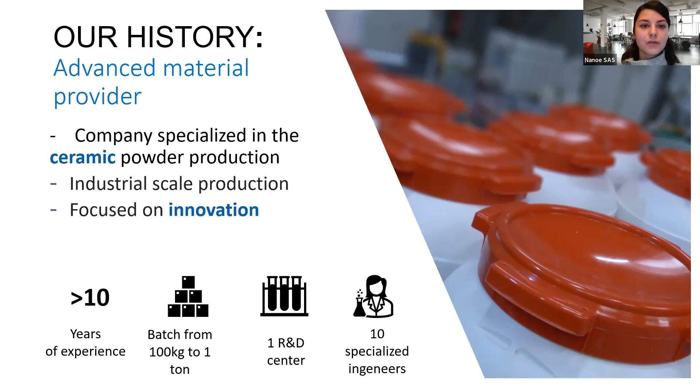So about our Zetamix filaments, I'm going to explain a little more about the technology and the advantages. They are really affordable because this technology is suitable with any FFF 3D printers. Our filament can be used with FFF 3D printers, so it's quite affordable. It's also easy to produce and easy to print, because FFF 3D printers are one of the easiest technologies of 3D printing.

For us, it's important to guarantee good material properties for our filaments, whether ceramic or metal, because we are a raw material provider. So the final part you get thanks to our filaments has good wear resistance, mechanical strength, and heat resistance, the same as our powder. Thanks to FFF 3D printing, it allows us to print hollowed out parts, internal channels, and other intricate structures.

The density of our parts is also important for us, and it's quite high: 99% for our ceramic parts and 95% for our metal parts after the post-process. And the last thing is that it's one of the fastest 3D printing technologies, because FFF 3D printing is one of the fastest.

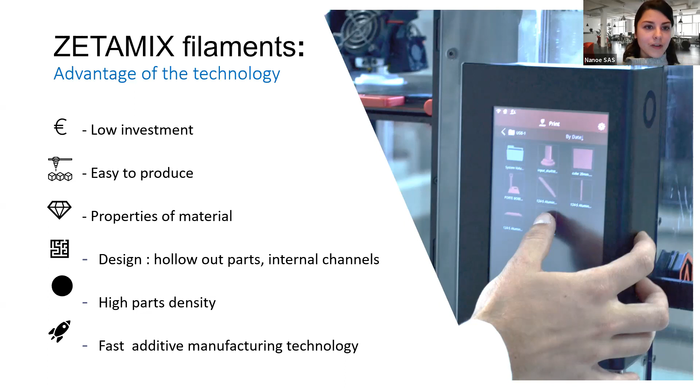So now I'm going to go into more detail about our offer. We are a material provider, so we provide filaments in alumina, white zirconia, and black zirconia, and stainless steel and H13 for metal.

We are not a machine manufacturer, but we provide machines to make sure that our clients have all the right equipment to begin printing and producing parts. So we provide a printer, the Raise3D Pro2, a debinding kit, and a sintering furnace, the Zeta Sinter.

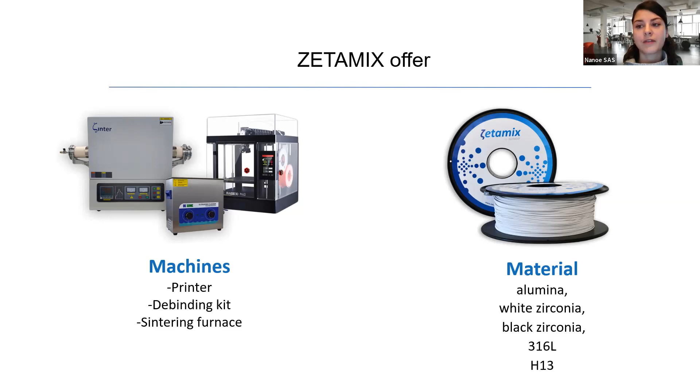So what is in the filament? Our filaments are a mix between ceramic or metal powders and two kinds of binder. To make sure our filament is printable, we cannot make filament only with powder; we need some binder to make it printable. Because of that, we have a post-process to reach the 99% density, or 95% for metal.

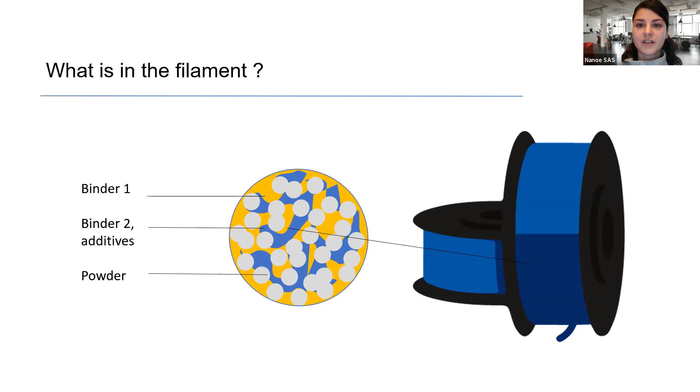So I'm going to detail the process a little more. First, let's begin with the ceramic process, alumina and zirconia. It's a 4 step process with file preparation and printing, the same as any FFF 3D printing process. After these 2 steps, we have a debinding step, a chemical debinding process to remove part of the binder. And after, we need to sinter the part under air to make sure the part densifies and reaches the final density.

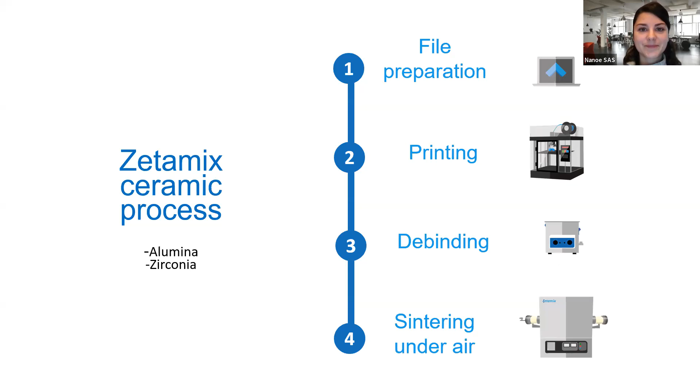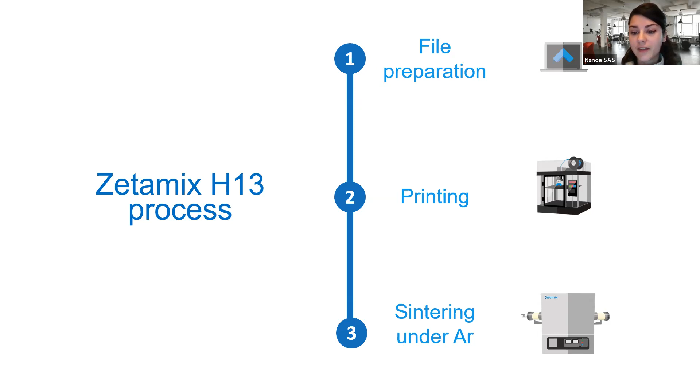For H13 filaments, the process is only 3 steps, with file preparation and printing, but there is no chemical debinding step. The sintering and debinding can be operated in the same furnace, done under neutral gas and argon. This can be done thanks to our Zeta Sinter furnace.

For our stainless steel, it's a little different too. The file preparation and printing remain the same, but the sintering has to be done under hydrogen, and this step cannot be done with our Zeta Sinter furnace and needs a specific furnace.

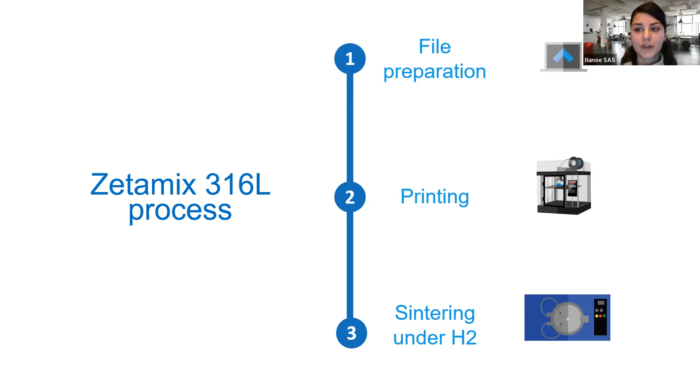I'm going to detail each step a little more, starting with file preparation and printing. As I said earlier, it's almost the same steps as regular FFF 3D printing. The only thing you need to consider is the shrinkage—your parts will get smaller during sintering, so you need to make the part a little bigger than the final one during the file preparation step.

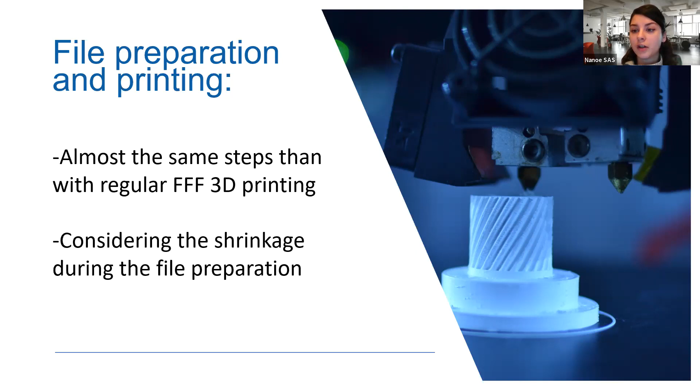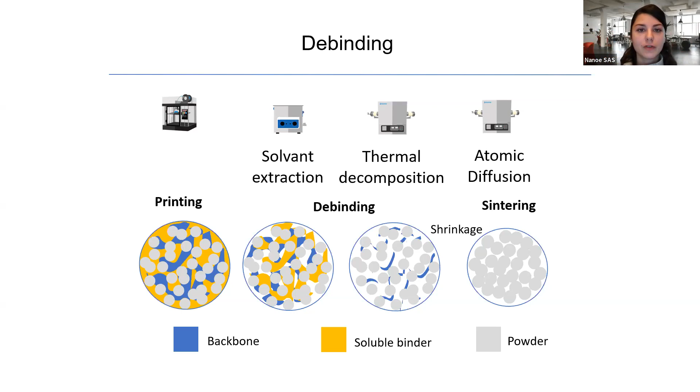For debinding, let me explain what happens during chemical and thermal debinding. Our filaments are made with ceramic or metal powders and two kinds of binder. The first step to reach final density is removing this binder. For ceramic, solvent extraction removes part of the backbone and the soluble binder. Then thermal decomposition, whether for metal or ceramic filaments, removes all the soluble binder and more backbone. After that, during sintering, shrinkage happens, the part gets smaller, and all the binder is removed. I'll explain that better in the next slides.

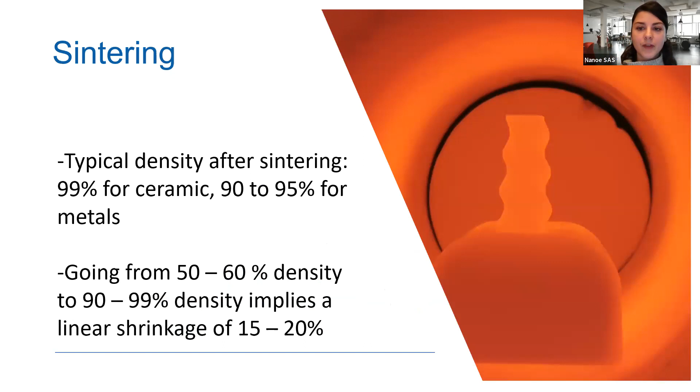Now, the sintering. Our parts have high final density, but your printed part only has 50% or 60% density. To reach 99% density at the end implies a linear shrinkage of around 15 to 20%. So what happens exactly during this sintering process?

There are three stages. The first, when you put the part in the furnace, is the initial stage where you have a green part—it's like thermal debinding, when the backbone and binder are removed. Then the furnace goes up in temperature, up to 1200 degrees Celsius, and there is neck formation between powder grains, as you can see in the picture. In the final stage, when you reach 1400 degrees Celsius, the grains coarsen and the part becomes smaller. That's what happens during the sintering process.

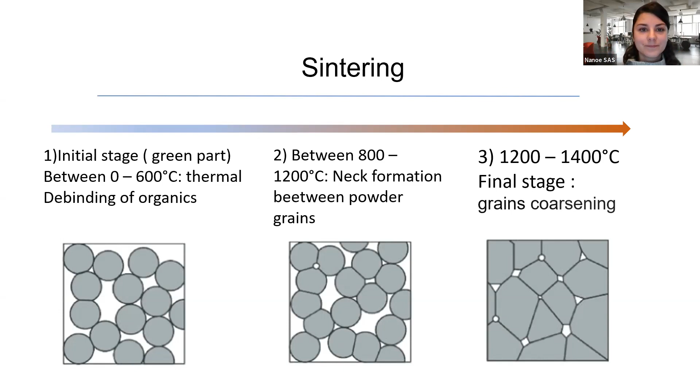Now that we've explained the whole process in detail, I'm going to go into the applications by use case. I'll present some use cases from laboratories, industries, and final parts from luxury. I'll begin with a ceramic example, and after that I'll introduce some metal examples.

My first example is the LMPCA laboratory. This laboratory specializes in the study of ceramic materials. They are studying Zetamix parts, and they take this opportunity to use Zetamix technology to make laboratory consumables and facilitate supply chain management.

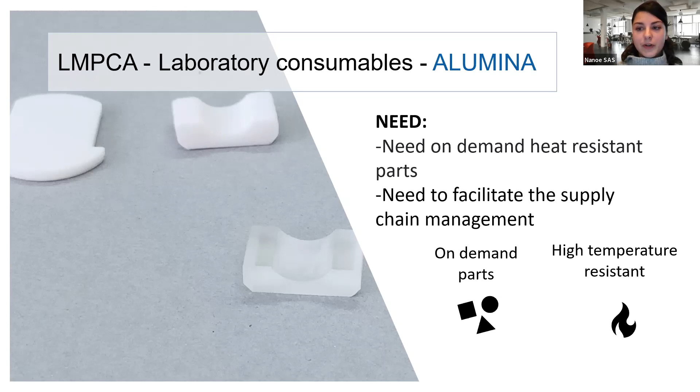For example, my favorite here—they are printing thermogravimetric crucibles. This is the crucible. Why are they printing it? Because this part is a really tiny, very expensive crucible that is only used once, since the powder can pollute the crucible during the test. Because of that, they need a very precise supply chain management procedure, and it's easier for them to print this part and internalize its production than to ask for a quote and wait for the product.

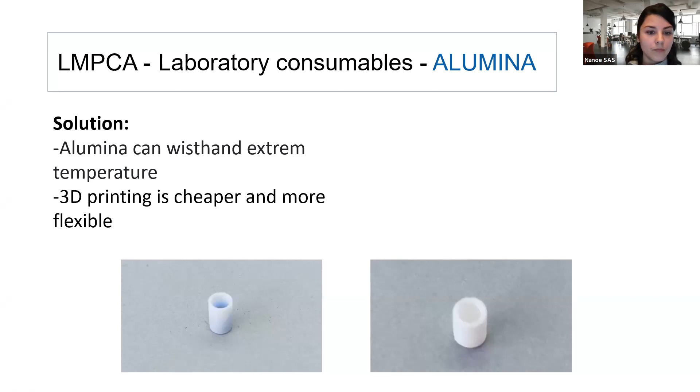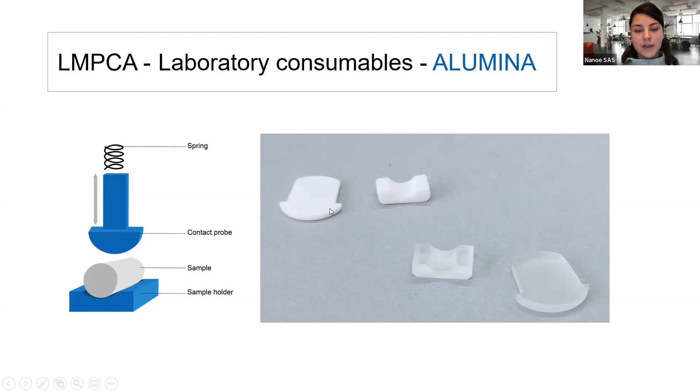The second use case is more industrial—I'm going to present the application from Orbital Service. Orbital Service is a company specialized in orbital welding machine manufacturing, and to improve their product, they invested in 3D printing to solve issues they were facing.

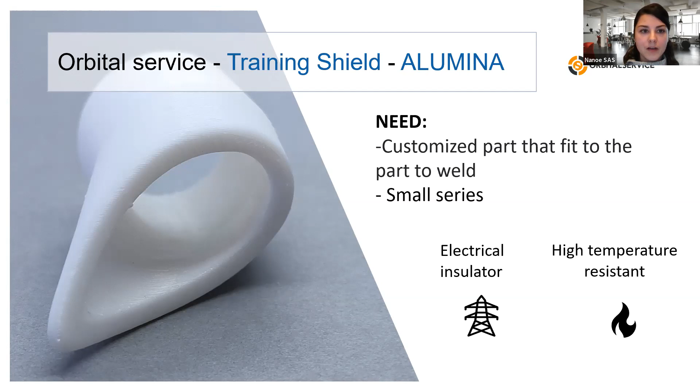The most important issue they faced was oxidation of the part during welding. Because they are welding parts that are not flat but have a round shape, air can interfere and cause oxidation. When the company is welding, they use neutral gas to prevent oxidation, but because the shape isn't flat, there are gaps and air can interfere, as you can see in this picture. So they decided to make this part, the trailing shield, in alumina thanks to Zetamix, made to perfectly fit the tube they were welding.

Why did they need Zetamix technology? Because they needed a heat-resistant product, alumina, and a material that is electrically resistant, to make sure there are no short circuits or similar issues. Thanks to this new part, they can improve the quality of the welding and avoid oxidation.

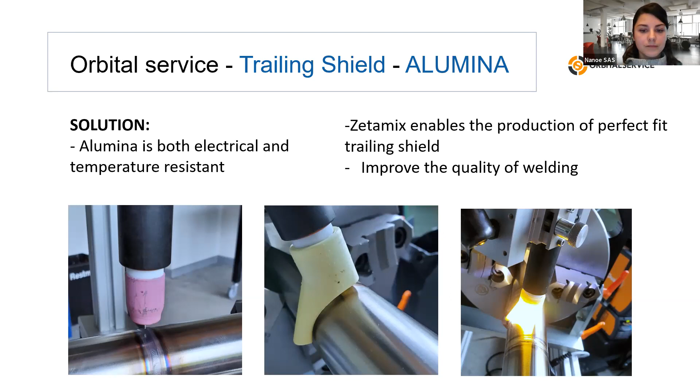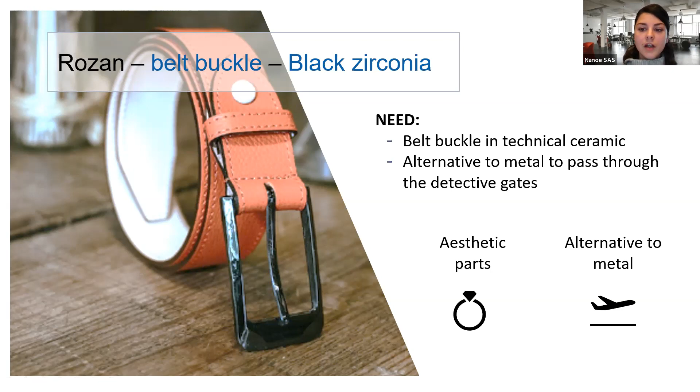For this buckle part, they could not find any affordable solution to produce it, so they decided to make it in Zetamix black zirconia. Black zirconia is a really interesting material for luxury because it has an aesthetical finish. It can be polished or have a matte finish, as you can see here. And of course, it passes through the detector gates. Thanks to Zetamix, they can cut the price and cost of the belt. With a regular process, it would cost 200 euros, but thanks to Zetamix, it's only 30 euros per belt.

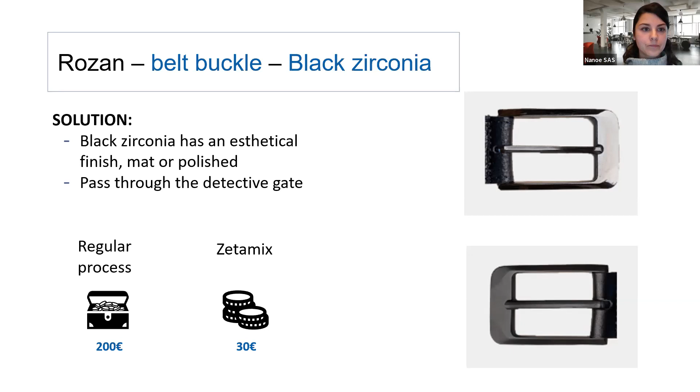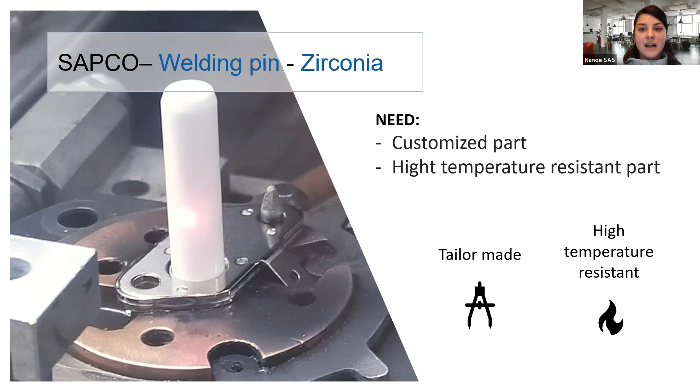But to do that, they need a welding pin to make sure everything fits together, this part here. The machine manufacturer provides them a plastic welding pin. And because it's welding, this plastic part was burning and melting, triggering machine halts every day. So they decided to make this welding pin in zirconia, a heat-resistant material, thanks to Zetamix, because it's easy to process. The part was made in only 5 days, and now this part has to be changed only once a month instead of once a day, reducing machine halts and saving resources.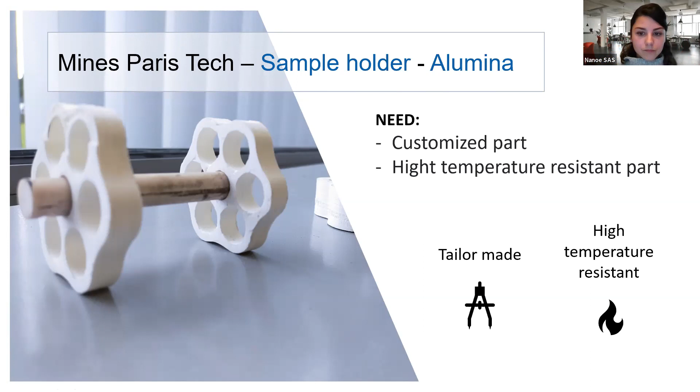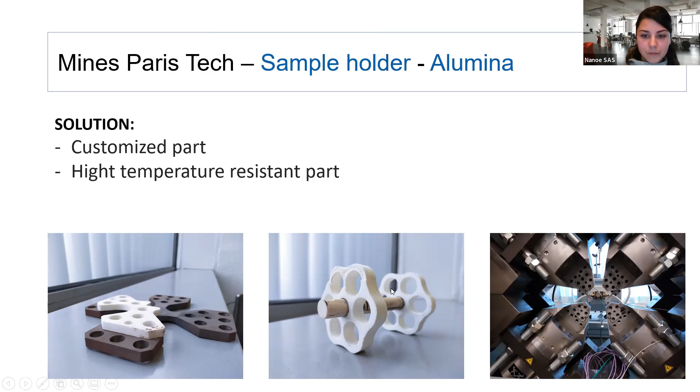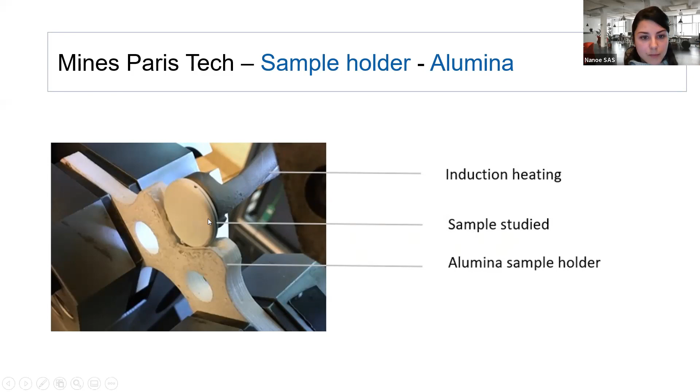Another example is with this machine. Mines ParisTech needs to heat up a small sample, and they have no machine device to do that. So they decided to use their biaxial testing machine to do that, without the option of breaking the part, only the option of heating it up. To do that, they needed some adjustment, and needed to print a new sample holder, the white part you can see here, to fit it here. So you can see the picture. This part needs to be resistant to the electrical induction system and needs to be heat resistant. So you can see here, the induction system, the sample studied, and the alumina sample holder.

I'm going to come back to some more industrial application with Petit Spare Part. Petit Spare Part is a provider of spare parts for the textile industry, and it's important for them to have stock or to make sure they can provide parts in record time. But one day, Petit Spare Part had a new kind of order. The client wanted a part, a thread guide, that doesn't exist anymore because the looms they were using were too old. So this kind of part had to be made in Zetamix zirconia, because it has to be wear resistant and smooth to make sure it will not damage the textile.

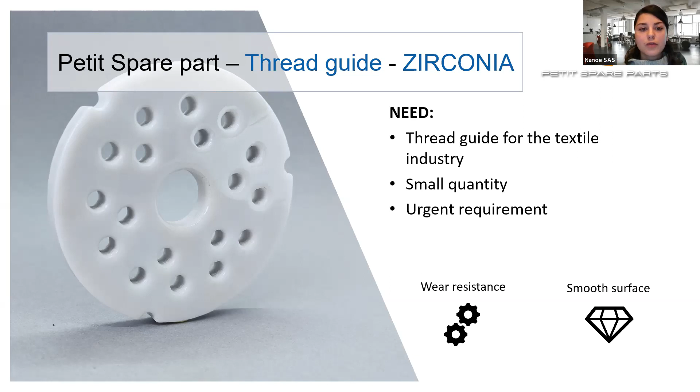Thanks to Zetamix 3D printing, Petit Spare Part succeeded in making this part in record time in Zetamix zirconia, because the part can be made in only 5 days. And after polishing, the part was really smooth and, of course, wear resistant.

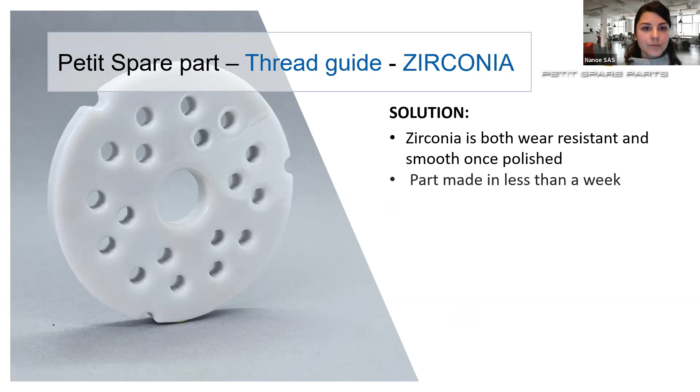So let's focus on more metal applications. I'm going to begin with stainless steel with this jaw. The industrial company wants to stay anonymous, but this company wanted a jaw adapted to the machine and the part, and wanted on-demand parts.

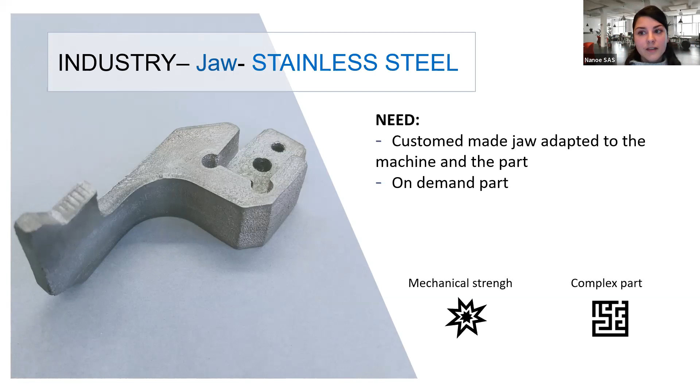So Zetamix technology was a good solution because the part in stainless steel has a very good mechanical strength, and it's possible to make complex parts. The solution enables the company to save resources, because if they would like to do this part with a regular process, it would cost 150 euros.

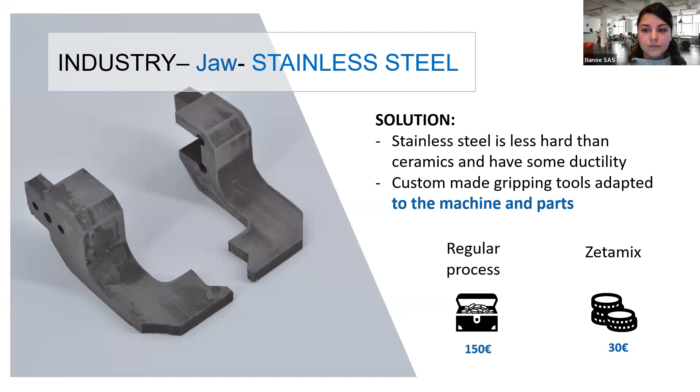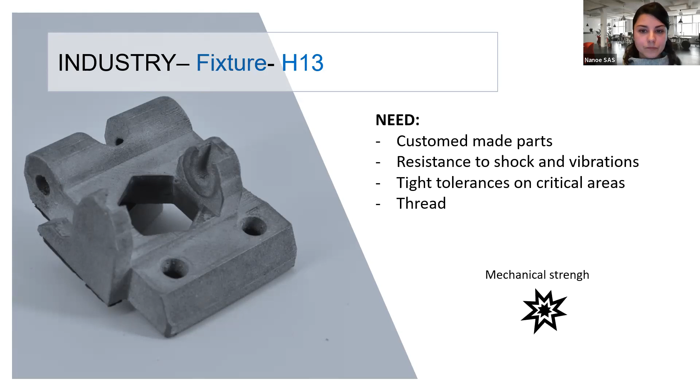Thanks to Zetamix, it's only 30 euros. Another example with H13, the same, the industrial wants to stay anonymous. Here, the client would like a custom-made part that can resist shock and vibrations, and we can post-process a machine if needed. So H13 is hot and cold tooling metal, so it's the best metal for post-processing. It has a really high mechanical strength, and it enables the company to save money, because with a regular process, it would cost 200 euros, and with Zetamix, it's only 30 euros.

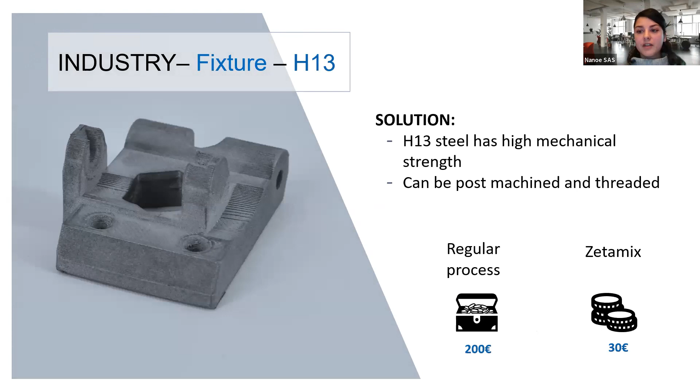So I'm going to come back to some ceramic applications, two last applications with the LEAT laboratory. It's a little different with the last one. LEAT laboratory is specialized in research into new telecom antennas. So they need dielectric material, and they need to test intricate structures.

These kinds of antennas are made in alumina because it's a dielectric material. LEAT is not specialized in ceramics. They just want to research and find new structures to make new intricate structures in antennas. So that is interesting because it will be a final object that can be used in everyday life, even if you will not see it because it's inside the antenna.

But here, the laboratory is not focused on ceramic, but on innovation, and they want to answer the question of how to improve the antenna shape thanks to 3D printing.

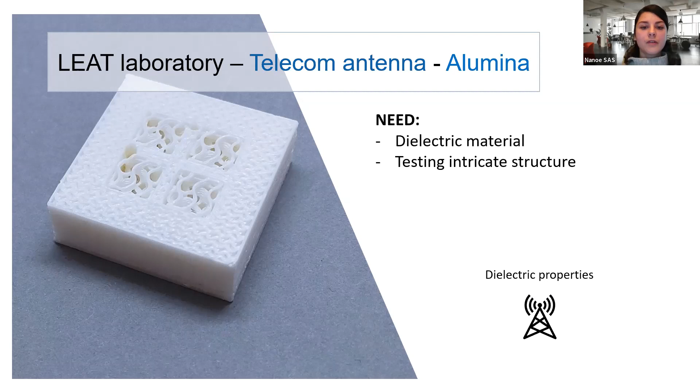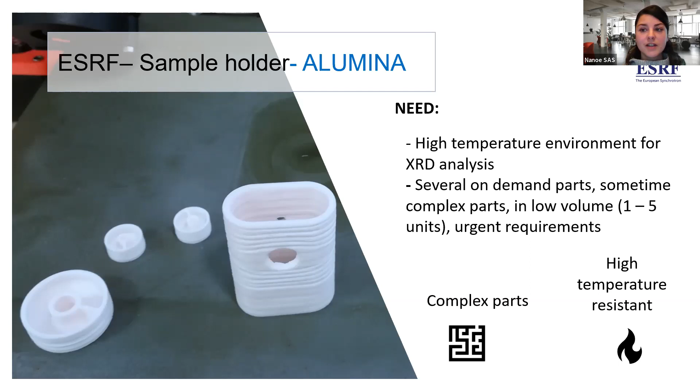And last example with ESRF, the synchrotron of Grenoble. Like the laboratory, they study materials, and scientists who use the synchrotron have only a few days to make their research, and the team that helps them find the right sample holders and helps them make the research has to be really reactive and work with urgent requirements. So thanks to Zetamix, they succeeded in improving the quality of sample holders and improving the quality of the experiments. So with this example, we can see the heating cartridge done in alumina.

Before, it was done thanks to slurries, you can see here. And this heating cartridge was not very secure because there was no wall separating the two electrical entries. Thanks to Zetamix, they made a part that perfectly fits the heating part, with a little wall to make sure there is no short circuit. So it's easier to make and it's more secure.

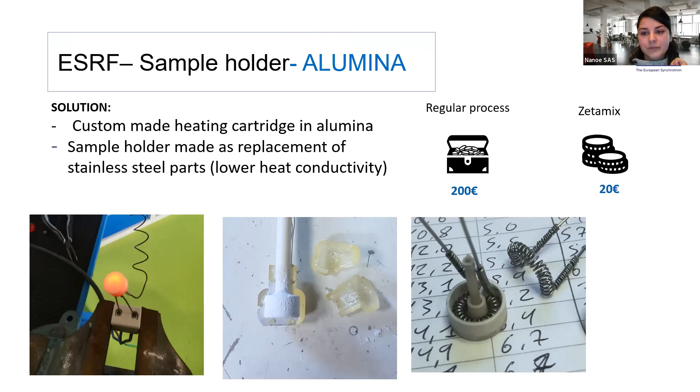So we finish with this example. Have you any questions?

Oh, okay, so a question about resolution. The resolution of metallic or ceramic printing. I'm not sure I understand the question, what resolution you are thinking about. It is the final resolution of the final part.

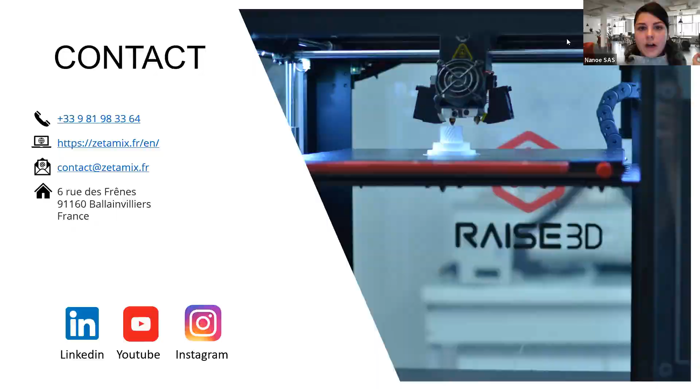I'm going to check the answer. I have a lot of documents to answer this. Sorry, I'm just looking for the right document. So I think the answer is 1 millimeter. So the part after sintering can have only 1 millimeter of difference between the dimension needed and the final dimension.

So what is the max size that can be printed? That's an interesting question. We can print whatever you want in the printer. There's no trouble with the printer, but it depends on the furnace you have. So you need a big furnace if you want to print a big part. With the tubular furnace we provide, only 10 centimeter parts can be printed because it's the size of the tube. Moreover, if you print a big part, you need to be really aware of the wall thickness. If it's too big, you can have some breaks inside depending on the printing parameters. But yes, if you have good printing parameters and a really big furnace, you can print quite a big part, but with the tubular furnace, it's only 10 centimeters.

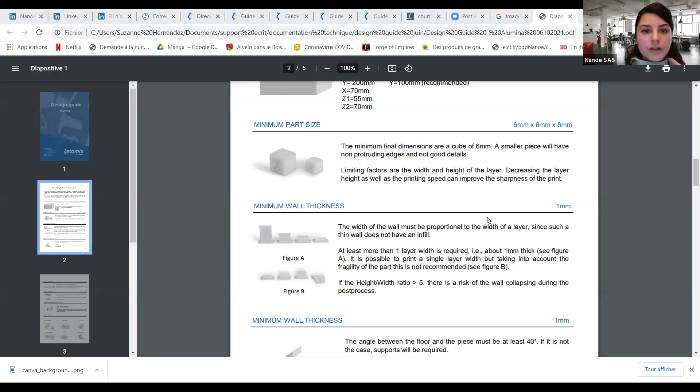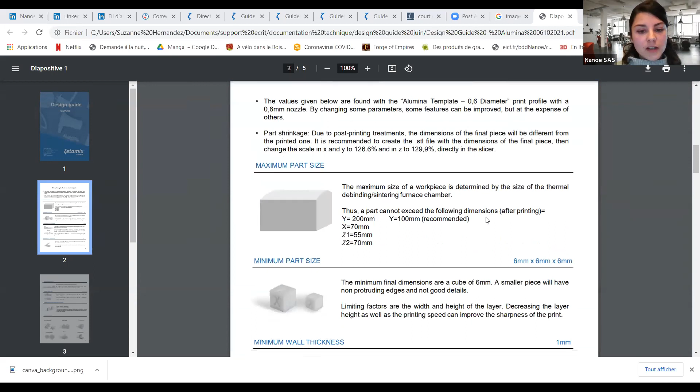Here is a design guide where you can find this kind of information on our website, in each filament's pages. For alumina, the minimum size, but it's the same for any filament, is 6 millimeters by 6 millimeters by 6 millimeters. You can see the picture here.

So I keep going. If we are giving some printing service—no, at NanoE we do not give printing service, but we have partners that can give this service. So maybe we can put you in contact with these companies if you need a ceramic part made by Zetamix.

How long is the whole sintering process? The whole sintering process is around 3 days, from the moment you put the part in the furnace to the moment you take it back. At NanoE, for example, we put the part in at the end of the week, and all weekend the part is sintering, and on Monday we have our final part.

A question about the gas that can be used for sintering. Is it possible to use mixed gas such as ArH5 for sintering metallic parts such as stainless steel. For stainless steel, it's not possible to use other gas—hydrogen really is the best, so the answer is no. The best is to follow the guidelines and sinter under hydrogen. If that's not possible for you, you can print H13, where you can sinter the part thanks to another neutral gas, argon.